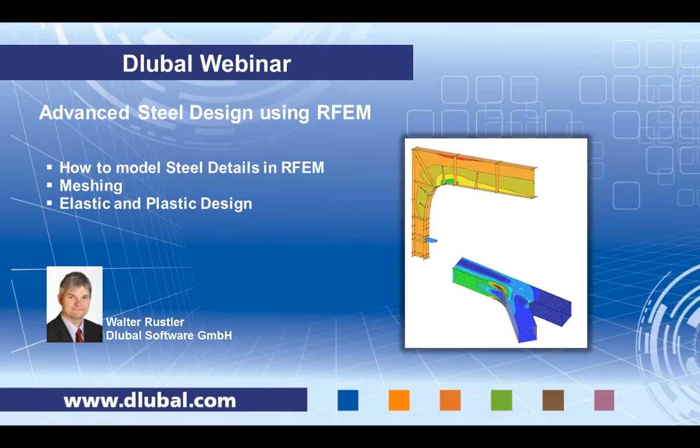Today we will see how to model steel details in RFEM. We'll also talk about meshing options that we have in RFEM, and then we will take a closer look at the elastic and plastic design capabilities inside RFEM and the additional modules.

When designing elastic and plastic models for surfaces in RFEM, we need additional modules. The main modules that we need are RF-STEEL, which is a stress analysis, which compares existing stresses to a fixed allowable stress. We also need RF-MAT NL, which gives us nonlinear material model capabilities, and this is required for plastic design.

If we talk about stability analysis, we need additional modules, RF-STABILITY and RF-IMP. We can then do an analysis against buckling, and we can do this in an elastic and plastic way. The procedure is to first have a linear analysis in RFEM for a surface model.

We need then an imperfection, and the imperfection can be derived from a buckling mode that is calculated in RF-STABILITY. We scale this imperfection mode to a certain size and use the imperfect model then as a basis for a nonlinear analysis and stress analysis. And we check then if the stresses are below the limit stresses. Important is that we use a nonlinear analysis for this check. We will see this in the live demonstration.

I now change to the RFEM software, and we start with modeling the structure. In order to make this a little bit shorter, I have already prepared part of the structure, which is the column. And we see here the column consists of actually 3 different types of plates. The web is an 8 mm thick plate, and then the flanges are made from 15 mm, and the end plate here is a 12 mm plate.

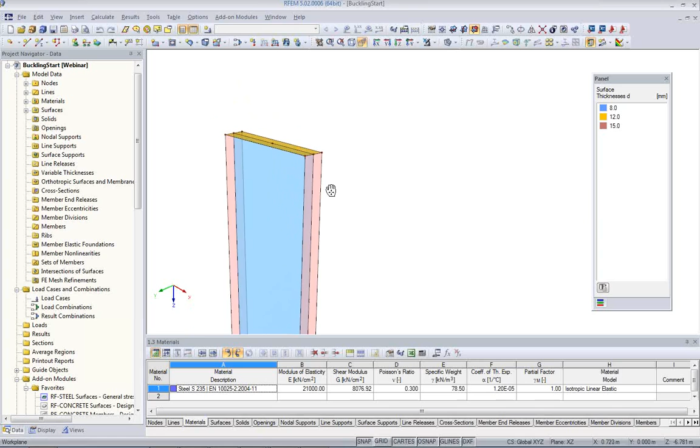We need now to model the part of the beam which is also tapered. We can do it in different ways. One way I can show you today is to extrude lines into surfaces. I select the lines and I go then to extrude line into surface. And when I do this, I get a dialog where I can set the material for the new surface.

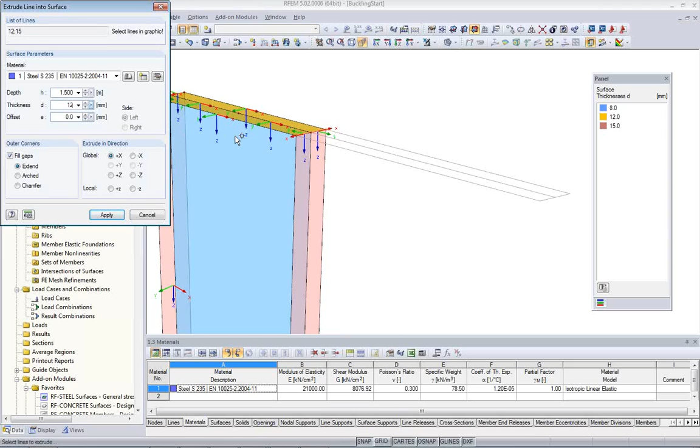First of all, I set the direction, which is the global axis X, and I see a little preview of the surface, and the length should be, in this case, 1.5 meters. The thickness of the plate should be the same as the end plate on top of the column, which is 12 millimeters. And with this, I can just press apply, and I create a couple of surfaces. Next, I'll create the end plate of the beam, which is now in direction plus Z, and the length is not 1500 but 600 millimeters.

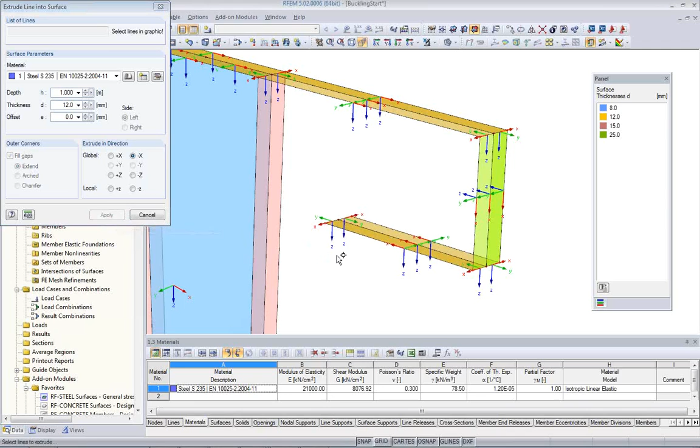The thickness should be, let's say, 25 millimeters. On apply, I get also this part of the structure. And I also can go back into minus X direction. Maybe I choose here 1 meter length, and again 12 millimeters of thickness. On apply, I get my flanges and the end plate created.

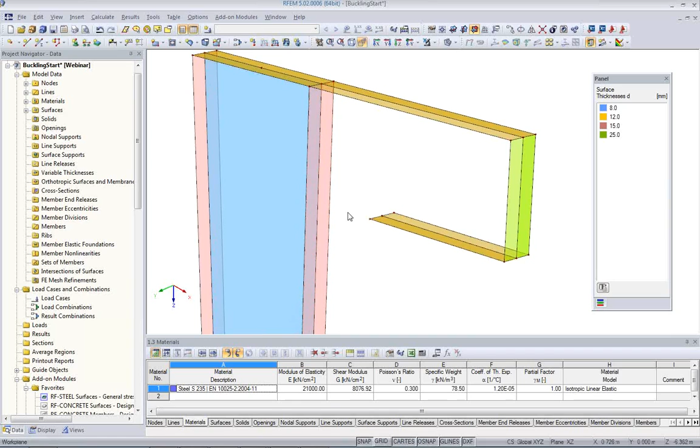What I'm missing now is the connection to the bottom part of the column, and I can do this if I would have here a connection node, or actually I want to have it on a certain distance, and the way I can do it, I can just create a division point on the lines. For this, it is important to know that the lines are modeled from bottom to top.

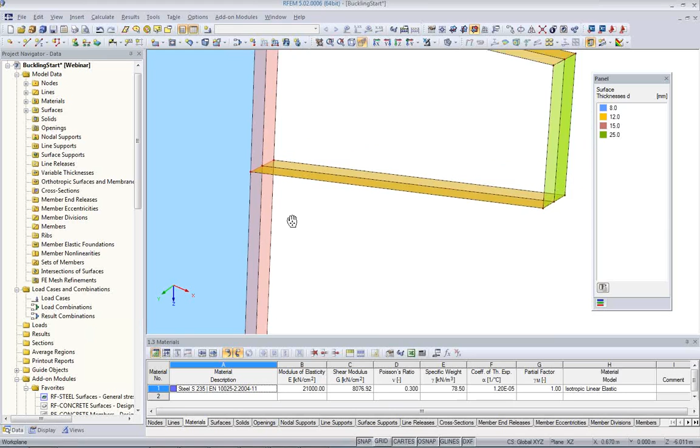And I can just select the lines, right mouse click on one line, and choose the command divide with distance. I want to divide it from the top, it is from the end, and I choose here 0.794 meters for example. On OK, I get here the division points. Next, I can select the end points of the surface and just drag and drop them, and they will snap to those other nodes. So this way I have the taper here very quickly modeled.

Next, I need the web. I can just simply select the boundary lines for the web. Thickness should be 8 millimeters again, it's a standard plate element, and I just select the boundary lines. Okay, this way I created very rapidly this beam part of the model.

I'd like to point out a few other things before we go on. In the display tree here, I can show the surface axis system. And when I show this, I see here there are some irregularities. This is important if you do steel stress analysis in such models, because all the stresses will refer to the local axis of the plate system predominantly.

So if I have different orientations in these local systems, when I show different stresses, I will see inconsistent stress diagrams along the surfaces. Because if I say, for example, I want to see sigma x plus, which is on the positive side of the local z-axis of the surface, then I see different values for both surfaces here. So because the plus side in the left part of the flange here is upwards and the minus side is downward. So if I want to see the stress on the outside of the flange, it's a good idea to reverse the local axes so they match.

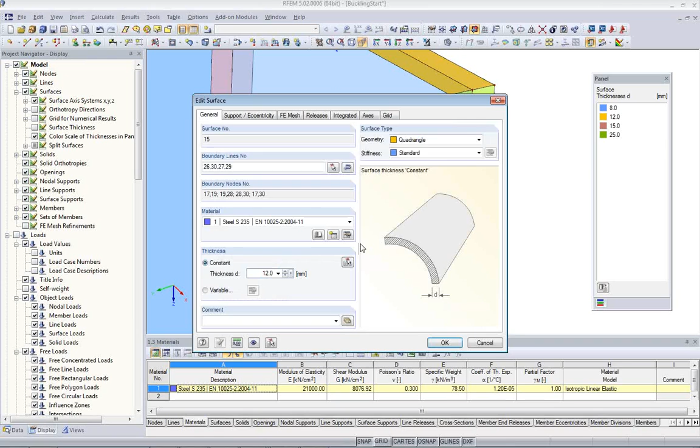Reverse local axis system. Here there's another specialty, because in the longitudinal direction of the flange we have the y-axis and not the x-axis. This is because the lower flange is not horizontal and it's a little bit out of the plane. How can I fix this? It is possible. For this I can use the following option. I double click on the surface, I go to axis, and here I find axis for input.

By default, the software chooses the direction. I can rotate it by a certain angle, or I can use axis and I can point to a line which will give the direction of the axis. So I pick, for example, the center line here. On OK the axis system is moved to the center line, but it's still wrong. The reason for this is because the line also points in this direction.

The same as the surface, I can click on the line and I also can reverse the line orientation. And now it's in the direction I want, and I can do this same thing for the other part of the flange. Axis, pick the template and click OK. It is important that you can check this.

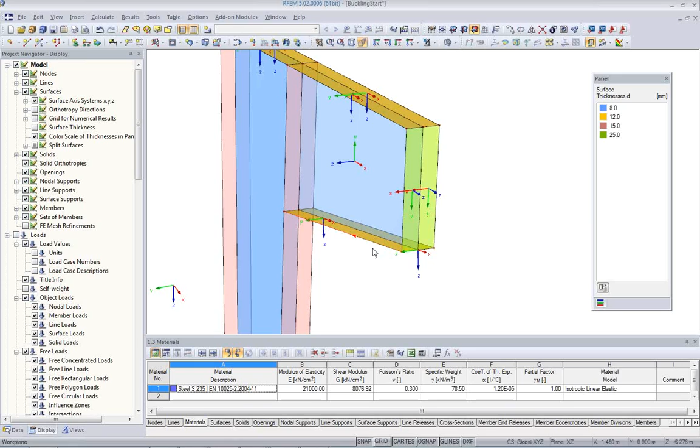This way you also can, for example, model circles or circle surfaces, and the local axis system will follow the perimeter of the circle or the radius of the circle. It is an important feature if you deal with such structures.

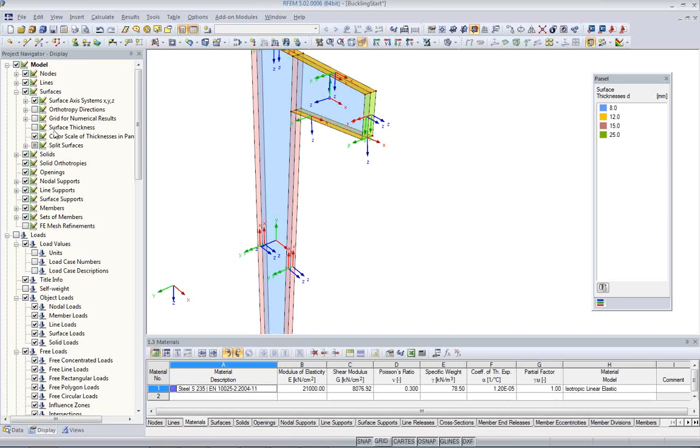Okay, let's check the web also. We have here the plus z direction of the beam and the column are different, so I do the same thing again for the column. Okay, now when I look at sigma x on the top flange, I get the same result for all the flanges, and I don't have to think which part of the structure I look at. Okay, I'm done with this, and I can hide the axis system again.

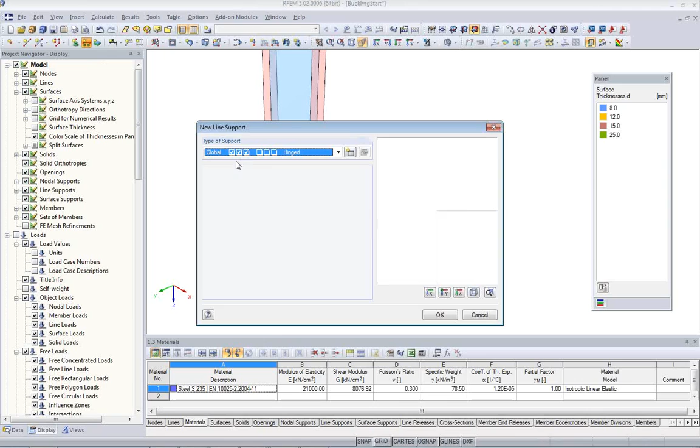Okay, next I'll need some supports. At the base of the column, I'll model a fixed support, and I can do this simply if I use a hinged type of support and assign this to all the lines at the end of the surfaces here. So because none of the lines can move, neither horizontally nor vertically, it creates some kind of a fixation.

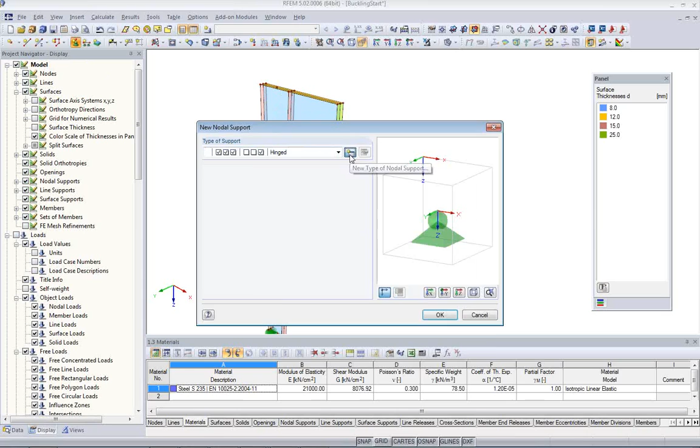Also, I need some lateral support. So I assume the knee here is held by some bracing in longitudinal building direction, and maybe some purlins are there. So I create a new nodal support that acts only in Y direction, and I assign this to the center here of the top of the column.

And also at the end of the haunch here, there should be some rotational restraints. So I have a fork type support basically that is horizontal and kind of holds the beam against rotation. If you find the support symbols too big, you can right click on it and decrease the size, or you can change it also with the right click in the display properties.

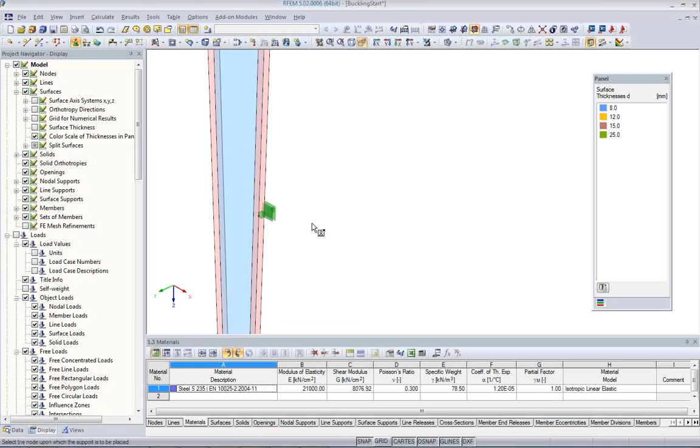Okay, one more nodal support I put here on the compression flange of the column to stabilize the column, and it should be of the same type, only horizontal in Y direction. I do this for one reason, to make it happen that we have later on, when we do stability analysis, a local buckling as the first buckling mode. Not in every case we have a local buckling of the web, it depends on the thickness of the web and the flanges, etc. Okay, the model I think is so far okay.

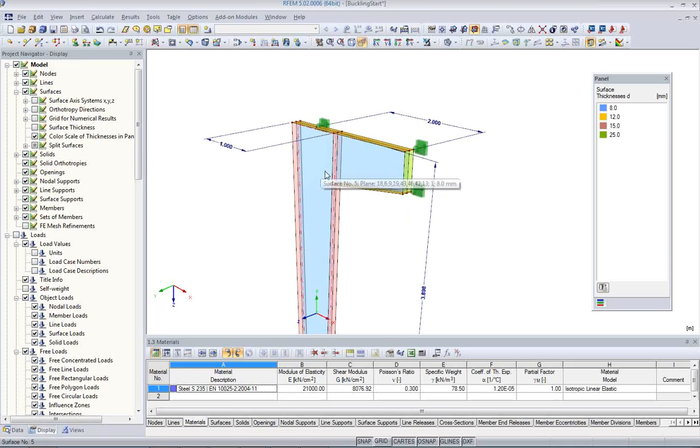Maybe to give you a better idea, I can show some dimensions. The depth of the beam here is about 1 meter. So when I take a look at the distance from the center node here to the edge, we have 2 meters. So if we introduce here a vertical load, it will create a bending moment of the amount of the load times 2 meters. So we have some idea what forces act here. The entire column is about 7 meters in height. Okay.

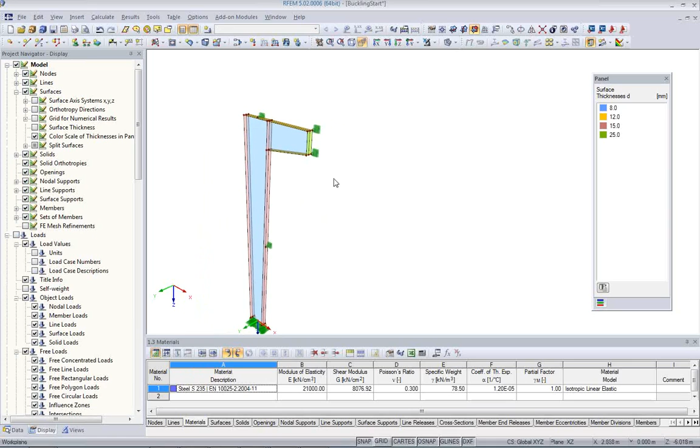Also, I need to talk now about loading. We need to apply some load. When I do the loading, I could also add here some beam elements and then model the rest of the frame, for example, as a member model, and then put the loads on the members, and the loads would be introduced automatically through the member. But I do here now an individual loading with a vertical load.

Typically what you should not do is introduce the load on one finite element node. So it's better to distribute the load along the depth of the beam, and the length of this center line here is 600 millimeters, just remember this. And if I want to introduce a bending moment of about 360 kilonewton meters in the center of the column, I need approximately, because we have here 2 meters, 180 kilonewtons of force here at the end of the beam.

So now if I want to do some kind of parametric analysis, I could calculate 180 kilonewtons divided by 0.6 meters, and I would get the value. But I have to do this each time I change the force. I'll show you how we could do it a little more elegantly in the software. First, I create a new load case. It should be without self-weight, and it should be geometrically linear static analysis. I call it design load. And let's assume this load has all safety factors and everything in it.

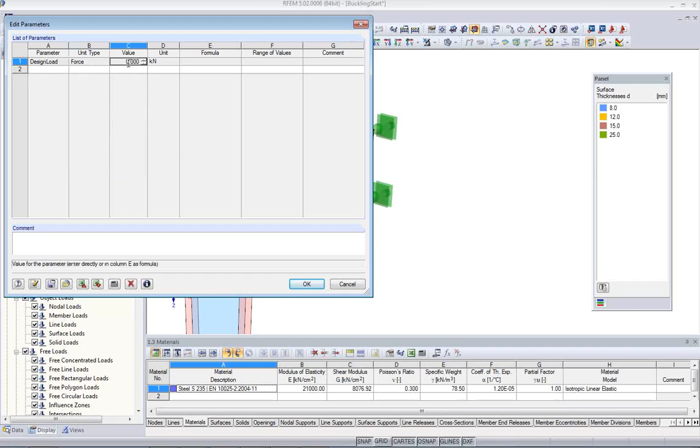Linear first order theory. In this load case, I create now my load, and I first create a parameter that's also called design load. The unit of this parameter is force, and the magnitude should be 180 kilonewtons. Now I will apply this force on this line. So I create a new line load in global direction related to the true line length. And I don't know the value here. I would have to figure it out.

But in RFEM you can use formulas, and the formulas use the parameters that I just defined. So I can use that parameter and multiply it by 0.6 meters. We always use basic SI units, and we see here there is a load of... 0.6 meters, that's not divided. We have to not multiply, we have to divide it, and then there is a load of 300 kilonewtons per meter.

By applying the formula, this value will be automatically entered here. We see a small triangle that signals the formula. On OK, I can assign the load here at the end of the line.

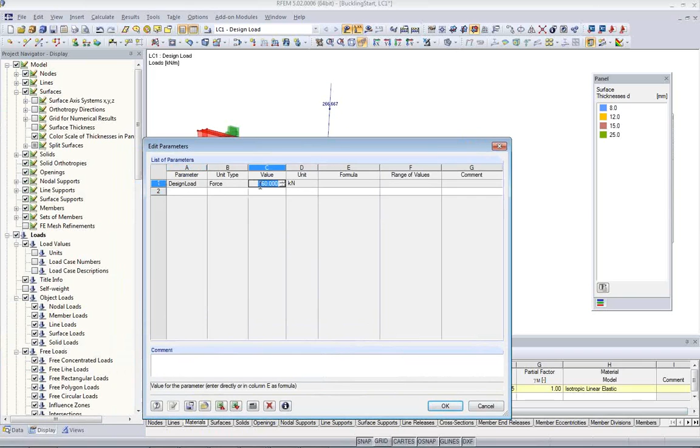If I want to change the load now, I simply go to the parameter, say 160, and if I click OK, the load will change. But I want to use 180, so I change it back. Just an idea of how RFEM helps you with such kinds of problems.

Before we can run the analysis, we need to talk about a finite element mesh. You find it in Calculate, Finite Element Mesh Settings. The important parts of this dialog are, first, the target length of the finite elements. It's set here now to 50 millimeters, but it can be changed to any size. RFEM will try to make finite elements with a mesh length no longer than 50 millimeters.

I'm not pointing out all the details of this dialog, just the most important settings. First, we can have some influence on the shape of the finite elements. They can be only rectangular, or quadrangle, they can be triangular only, or a mixture of triangles and quadrangles. We found that this mixture gives us the best results.

Triangular meshes are not necessarily lower in quality. It depends on what type of elements you have, and some surfaces cannot be created with just rectangular mesh shapes, so for us this seems to be the most practical way. But if you want to, you can select different settings here, and we also try to use identical squares or rectangles where possible.

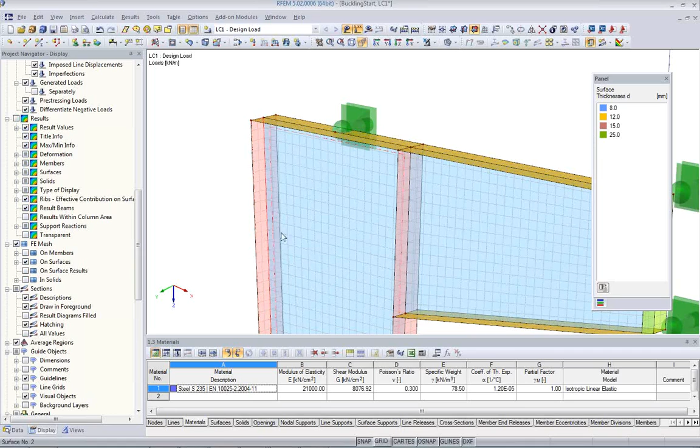But if you want to, you can change it, make a finer mesh overall, or double click on each surface where you have FE mesh settings as well, and a so-called mesh refinement on each surface. If you want, you can make it finer. If I do this once here, click on OK, only this surface will have a finer mesh.

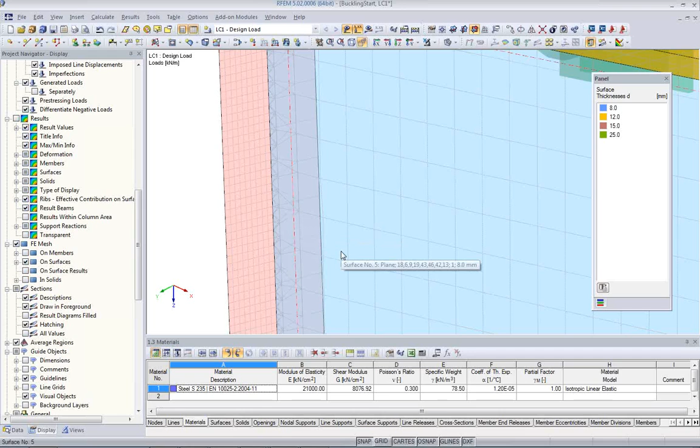Once I create the finite element mesh by clicking OK, it takes a little longer to create that mesh. Now we have a very fine mesh here, and the transition from the rough mesh to the finer mesh is done over certain cells of the mesh, which gives us a smooth transition from the coarse to the finer mesh.

This will create, of course, a longer calculation time, and you should think about whether you need a real fine mesh or whether you can get by with a coarse mesh. This depends really on the structure. In general, we say you should have maybe 4 to 6 elements along a surface of interest. If you don't have detailed interest in the results, you may get by with a more coarse mesh.

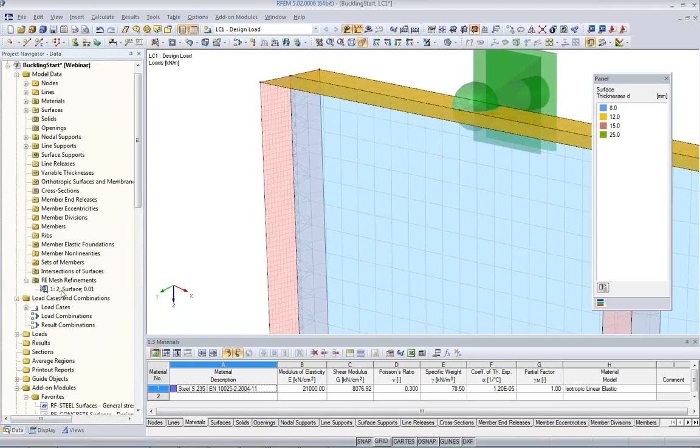I will delete this surface mesh refinement and stick with the regular mesh we have here, and create this one more time. Okay, I think now we are ready to run the linear analysis.

By the way, I have here 4 different thicknesses, and I show the panel of the thicknesses in this structure. With the views tree, you can activate... actually I wanted to show the display tree. With the display tree, you can show here the colors in the rendered structure by surface thickness.

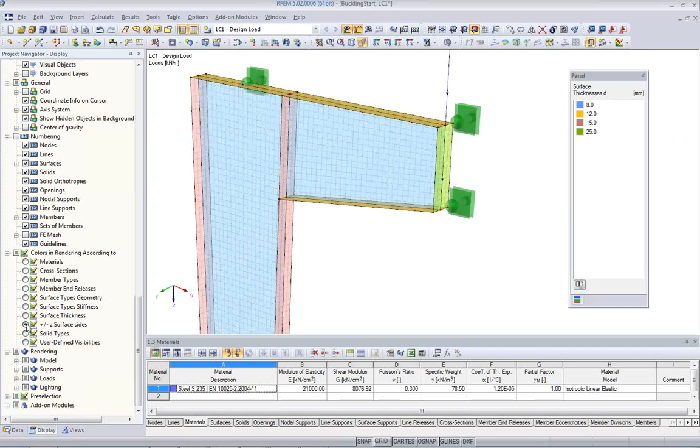By default, we have here materials, and the scale will be gone. But if you have here surface thickness, you see here the colors, and you can check whether everything is correct. Also, you can check whether the plus or the minus surface side gets also different colors. It's a good thing to control structures if they have different orientation.

The plus and the minus side will have different color. So you see here that, for example, the web has all the same orientation. If you look at it from the other side, it has a different color. So this is also a good way to control if everything is correct.

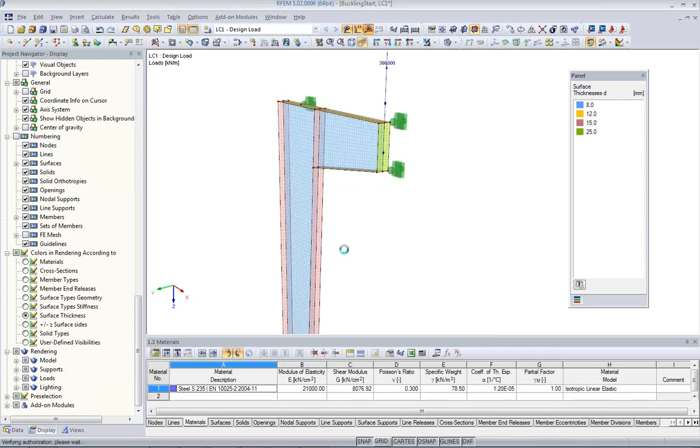We stay with the thickness maybe. All right, to run the analysis, I just simply say here, show results, and it will start the analysis. Now we have, I forgot to tell you, we have steel as a material, and it's linear elastic.

What I see here are, well, I see here first a new result navigation tree that starts with deformation, and I can check if my results are okay. I can hide, for example, the load. Hang on, decide, hide my loads, okay. And I can see if everything is symmetric.

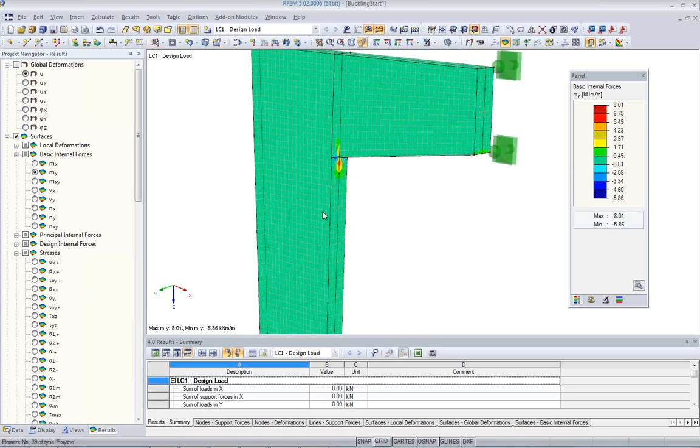So there should be no deformation in Y direction and in X direction, of course, but everything looks good. I also should take a look at my basic forces, like I have bending moments, and that should be also symmetric. I have bending moments the other direction, and I have axial forces. And if I have everything correct, then I get a nice symmetric view. This is a good way how to control if your input is correct.

Also here, if I have a force downward here, there should be tension. So orange, if I look here, it's positive, so it's tension. Blue is compression, so it looks to be okay.

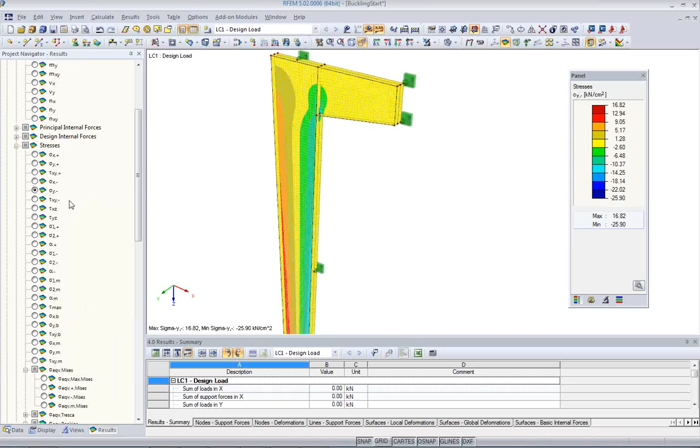Same way is with the stresses. I can go down and I can show sigma x, I can show sigma y on the positive side, for example, sigma x, and sigma y on the negative side. So there are different values. If I go here, there should be different, should be visible, and it's important to have the directions correctly.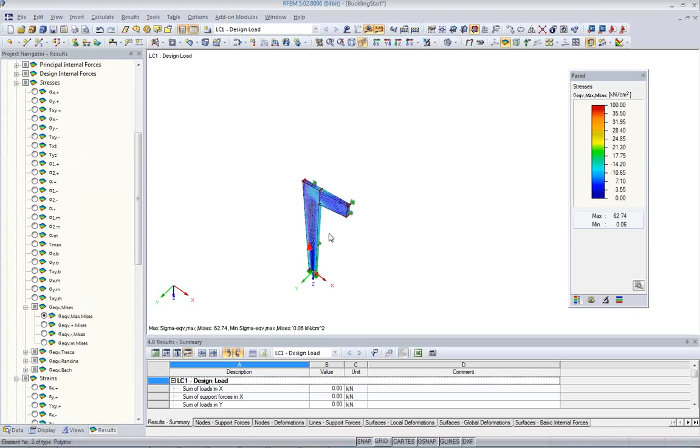Important is also maybe to look at the equivalent stress, von Mises. If I look here, I get a nice smooth display of my equivalent stress. But I only see the existing stress. I don't know, do I have stress over the yield strength, for example.

To do this, I'll have to take a look at RF steel surfaces. Inside RF steel surfaces, we can check against a limiting stress. It's a quite simple module. We have the ultimate limit state design case, and we check here our design load case.

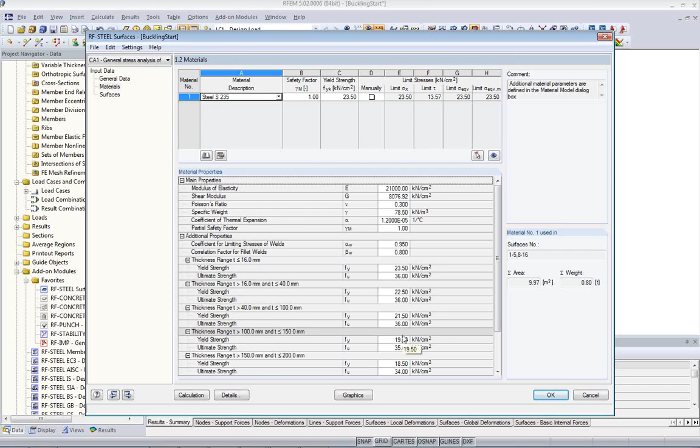I could do also deflection, so it will check some deflection, but in this case, deflection is out of scope. So I see here all my materials and my yield strengths for different material thicknesses, which is also important because if you work with thick materials, you can have different yield strengths for different thicknesses.

The surfaces are listed here, and with this maybe I check the details. In the details I have options to set the individual stress types. I can check my limit deflections for the serviceability limit states, and in the options I have the options to say the important things are distribution of internal forces, and it's set to continuous within surface. I will come back to this point later.

Maybe because I read it here, one important thing results in FE mesh points and grid points. There is an important thing which I have to show maybe after I go back to RFEM.

Let's first start with calculation of the stresses and comparison to the limit stress. I run the analysis and I see here now I have shear stress, main stress, positive side, negative side, medium or membrane stress, and equivalent stress, which is exceeded by a ratio of 2.67. And you see here also, if I click here where this exceeding part is, typically it is now here where we have this compression point.

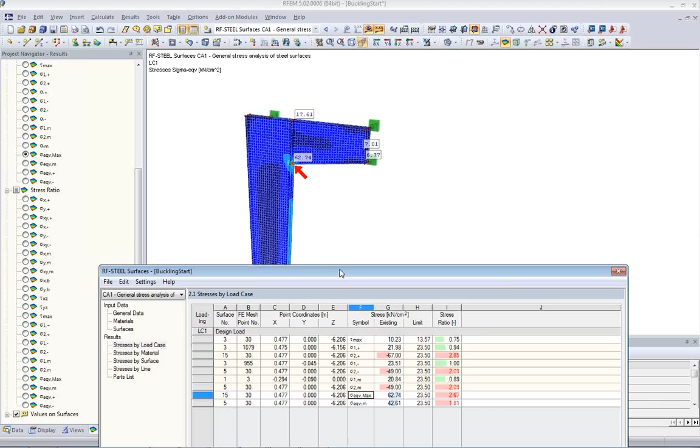Okay, so let's take a closer look at this in the graphics. We see here the stress ratio for sigma equivalent in RF Steel Surfaces, and I can show it here. Everything that is above 1 is really dark red.

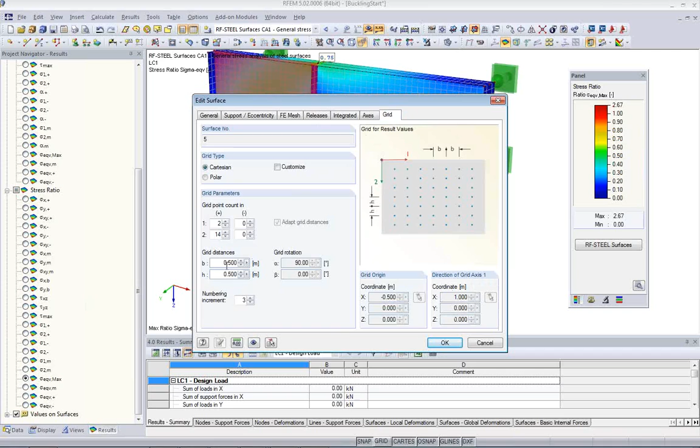Here we have some problems, some local overstress that I need to take care of. But I was talking about grid points and mesh points. It's important to know that each surface has an overlaying grid which can be controlled for each surface. It's set very coarse here. This is good, for example, if you work with concrete plates that are wide in dimensions, and you can control the output of the numerical values by grid points or mesh points.

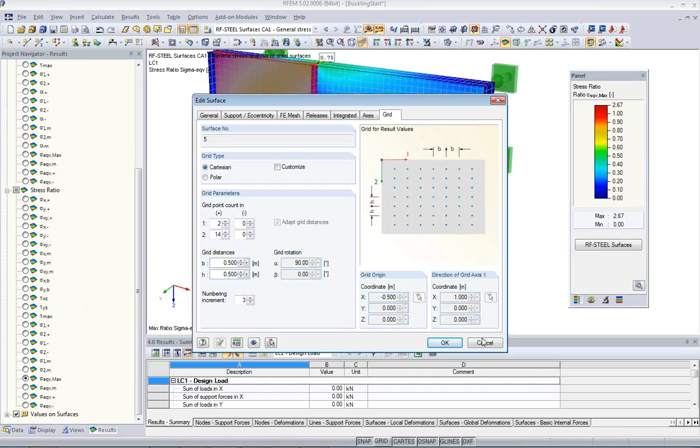In RF Steel Surfaces, I also have the option to set whether I want to see grid points or mesh points. If I say grid points, I have to recalculate and there will be fewer points. So mesh points is a good idea for such small dimensions. Here too I have the option to show results in mesh points and grid points.

If you want to reserve some capacity of the material for other things, you can reduce the allowable stress ratio to 0.8, 0.6. By default it's set to 1.

Okay, so now we have the problem that we have some places where we have too much stress. So what do we do with it? We'll do a plastic analysis. So this is the stress ratio. And how can I do it?

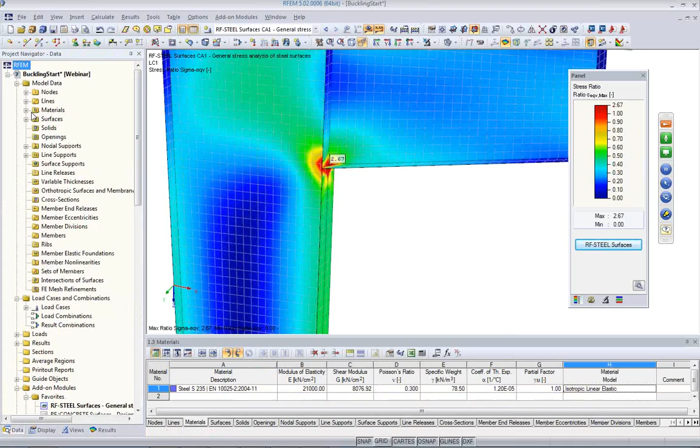For this, I go back to the material table, and in the material table, or you can also do it in the Data Navigator, you have materials, and you can edit the materials there as well. You have different material models. By default, RFEM comes with the isotropic linear elastic material model, and you can also use the orthotropic elastic 2D material model. All the other material models are part of RFMAT NL, an additional module that unlocks those options. There is an isotropic plastic 1D model for plastic analysis of beams, 1D elements. There is an isotropic plastic 2D, 3D material model that we'll take a look at pretty soon.

There's an orthotropic elastic 2D model, which allows you to have different stiffnesses in two different directions on a surface. There's an orthotropic 3D model, a more advanced model for 3D which has orthotropy in three directions, X, Y, and Z. The same thing is also possible for plastic design. An interesting thing for steel design is also isotropic thermal elastic, which allows you to set different elasticity moduli for different temperatures. So if you have a heated structure, the material gets softer.

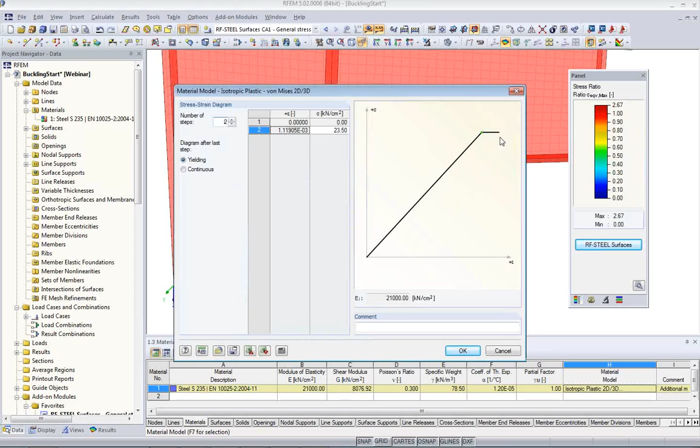The yield strength is entered here. It's set now to S235. We have a bilinear model in this case, so we can model some strain hardening above the yield strength. You can also use a diagram. The diagram in this case is identical for tension and compression. As a simplified model for trying things out, you can do linear elastic only, which is the same as we had before. I use the basic function with a yield strength of 23.5, typically for such cases.

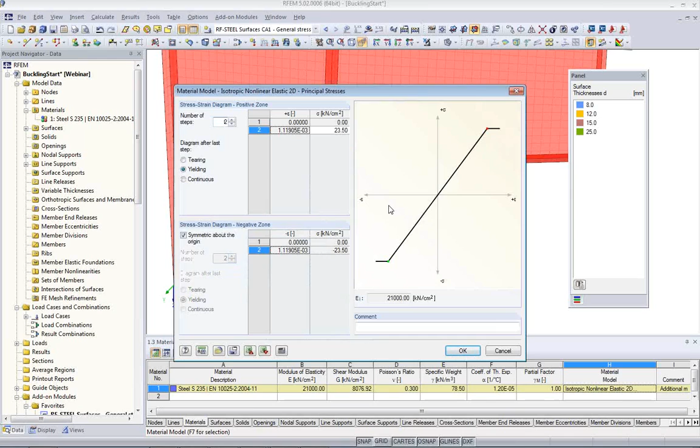Okay, another material model - this was for von Mises stresses. Another material model interesting for steel structures of this type is the nonlinear elastic 2D model, which is similar to what we've just seen, has the same options, but it can also behave differently in compression and tension, which the other model cannot. And it refers to the principal stresses. If you use the von Mises stresses, there can be situations where the principal stresses are higher than the von Mises stress, so you do not get the worst situation, I would say.

But it depends on regulations that you have to follow, which type of stress you have to check. I use this model now, and I use the basic function with a yield strength limit of 23.5 kilonewton per square centimeter. Since all the surfaces use the same material, all the surfaces can now yield.

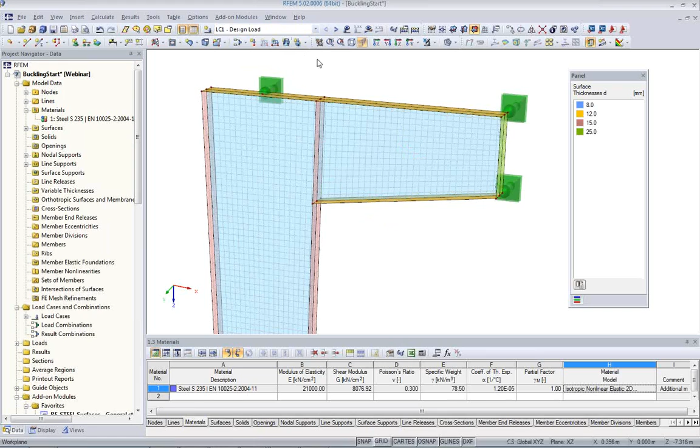Let's take a look at the results, and I calculate this first load case nonlinear now. You will see there are some iterations. First of all, we see here load increments, and different iterations because we have to check in each iteration what is the yield strength in each finite element mesh and how we have to change it.

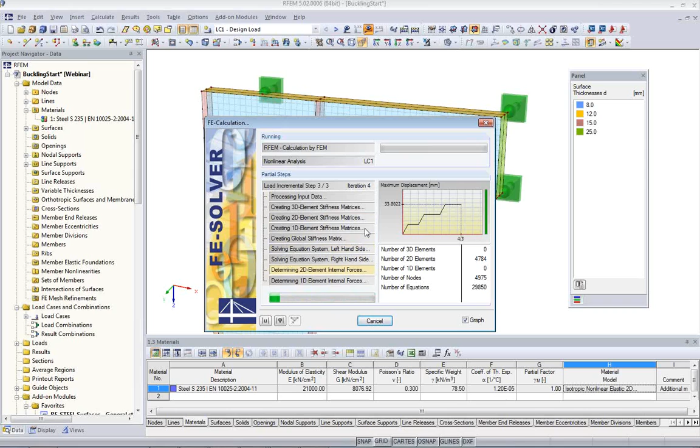It's also a good idea to work with load increments because you gradually load the structure and yielding starts gradually at the worst points and spreads from there. If you have a large yielding area and you apply the load in one step, it is kind of a shock for the structure because there's a big change in the strength and stiffness of the structure, and it can lead to not so good convergence during the calculations.

What we see here now is again the equivalent stress, max von Mises. And we see here it's still quite high. It's not 23.5. What is the problem? I have to explain a few things.

First of all, we change for each mesh cell, we change the stiffness. Therefore it is not a good idea to smooth the results, which is what we do by default over all surfaces. RFEM has some specialty how to display results. In general, you get rough results and you want to smooth them over one surface. But when we look at the plastic design and we change only the results per finite element mesh with one, let's say, elasticity modulus, then we have a constant stiffness over the mesh, and we cannot change the stiffness over the mesh in each point.

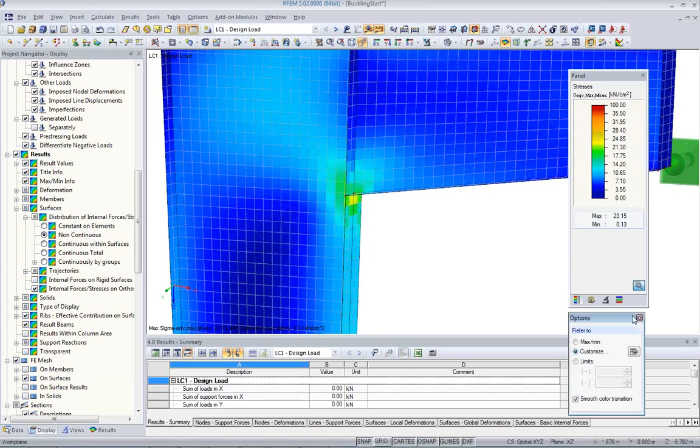So therefore, we have to take a look at the results constant per mesh. We can do this here with surfaces in the display navigator, under results, surfaces, distribution of internal forces, stresses, continuous within surfaces. So I mesh it, I smooth it over each surface. I can say non-continuous, you see there's a little bit of difference. Maybe I change the smoothing, and I can say constant. And if I go to constant on element, you see here that my stress is not red anymore.

Maybe I have to show this also in the result navigator a little bit differently. In the result navigator, I have the same trees as before, but I have additionally also criteria, and one criterion is the design ratio here. Because we have a yield stress, we can compare existing stress to the limit stress. And here we see we have now utilization ratio 1. We see here also with the nonlinearity rate where some yielding has happened.

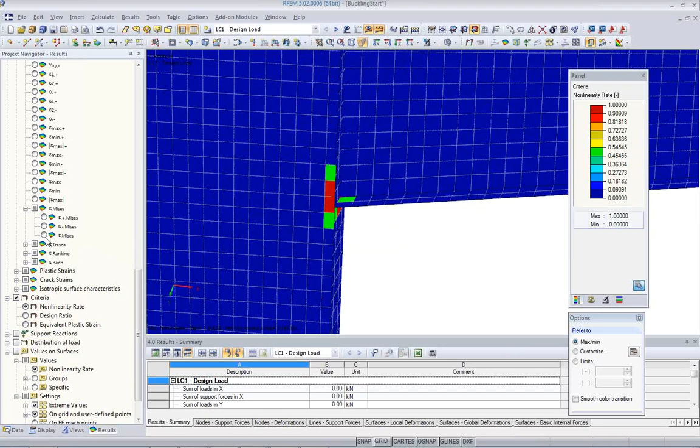And we should also take a look at the strains. The strains should not be larger than 2%. So once the material yields, the force will stay the same inside the material, but I can kind of elongate it as long as I can, but the strains cannot be unlimited. So in general, the limit is 2%, so 0.02. And we here have no problem, we are far away from that.

Design ratio is clear. And we can take also a look at the real stresses. There we should have now only stresses that are below 23.5, and we see that's the case here.

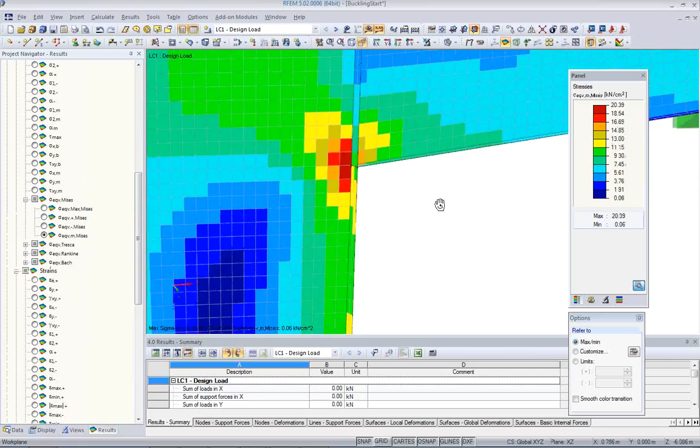Maybe to explain a little bit more about this smoothing, I can display here again the different options, but I also show the results. I show the result values, not the extreme values. I want to see everything.

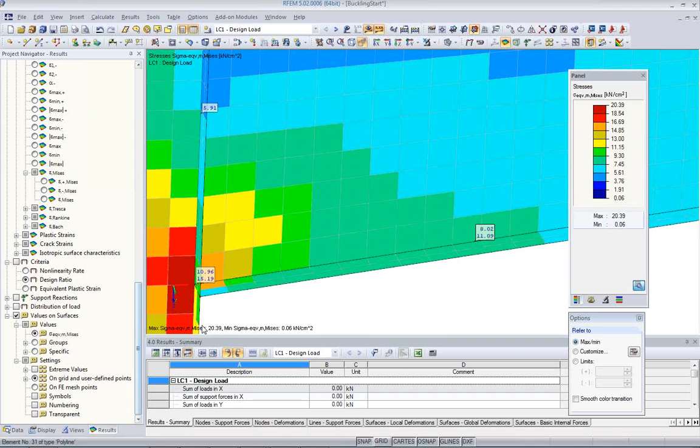On grid and user-defined points, on FE mesh points. So now we see here, if I look for each cell here, I see there is one value for each surface. If I go back to display and change it to non-continuous, I will see, it takes some time, I get for each finite element, for each connecting mesh cell, one value. Because I have 4 elements in this case, I have 4 values, and they're slightly different. So these are the values that I get from the calculation.

But nobody wants to work with such values. That's why we smooth them. In general, we smooth them.

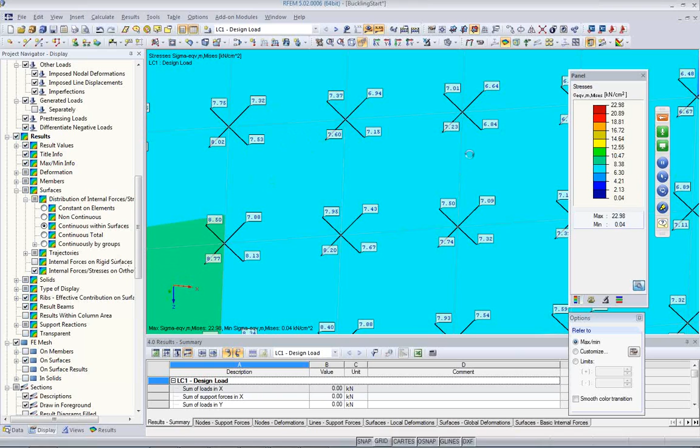So within each surface, we make the average of all 4 values and display the average value. If you talk about stresses, we cannot go over the surface edge because stresses are different when there's a different thickness. And if I smooth over the surface edge, I would make a mistake.

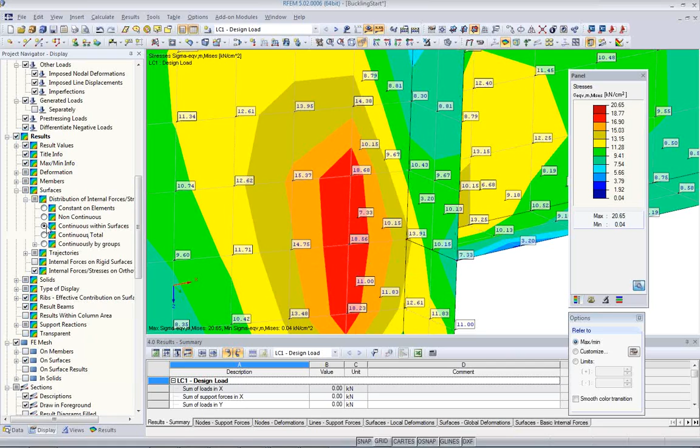This is why here are 2 values, because we have different thickness here in the flange as we have in the web. If I smooth continuously total, then I get 1 value also here, but there's a thick material, I have low stress, and there's a thin material, I have high stress, and make the average, which is not correct here. I have to stay within the surface, and this is why continuous within surface is on default, which is good in this case.

For elastic design. If I do plastic design, I have to look at the constant on elements results always, and I get an averaged value for each mesh cell. So it's also important to know, I hide the values again, that in that case the mesh might have to be a little bit finer when I do a plastic design, because I can then in a smaller grid change the stiffness on the structure.

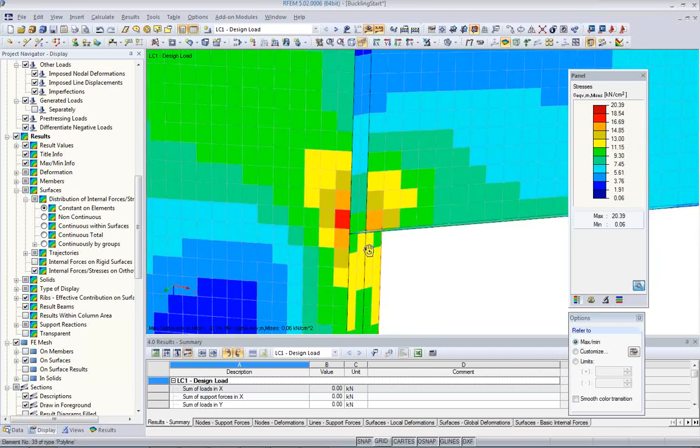So therefore, in structures like this, or where there are some points that are difficult, I can also introduce another mesh refinement for a node. I create a new one on this node. I create a rectangular or circular refinement, and by default RFEM creates a radius 5 times the global target length of the mesh, and the outer length should be the target length, which is compatible with the other mesh, and the inner length is 5 times smaller. If I do this, I have to erase the results and do one more analysis. Run this analysis, and then we continue with the buckling check.

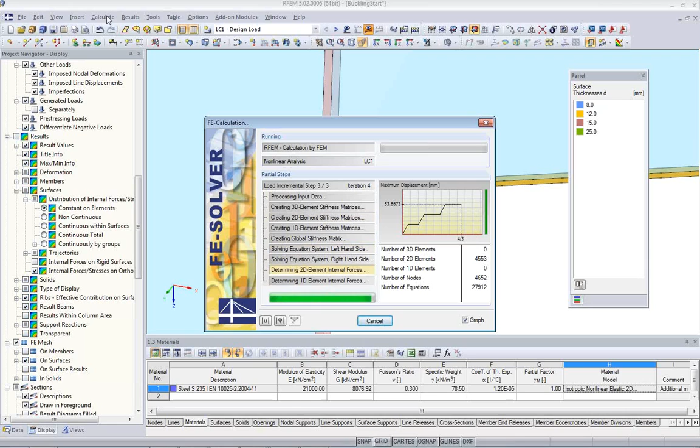Okay, load increments, one more time, I explained already. I have to show you where I can set those options. Those are in the calculation parameters. You can set increments. It's by default, I think, set to 5. If there are problems with convergence, you get a message and you can change it. If not, maybe you can stick with less increments and increase the speed of the calculation this way.

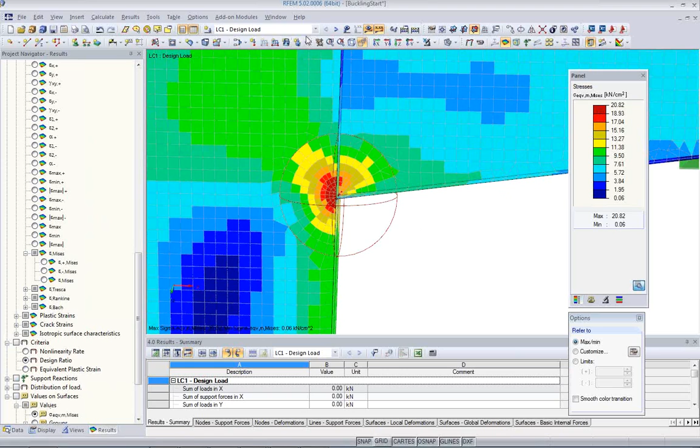Okay, we're still okay. We have for Mises stress 20.82. Also in the RF-STEEL module, if I go there, I can start it here again. As I showed you before, I can set those values here constant on elements. So also here, here's this setting. If I calculate it, I should get the same results, and the utilization ratio is 1 in this case. Okay, great. We are done with stresses. Everything is fine, and we don't have to do anything.

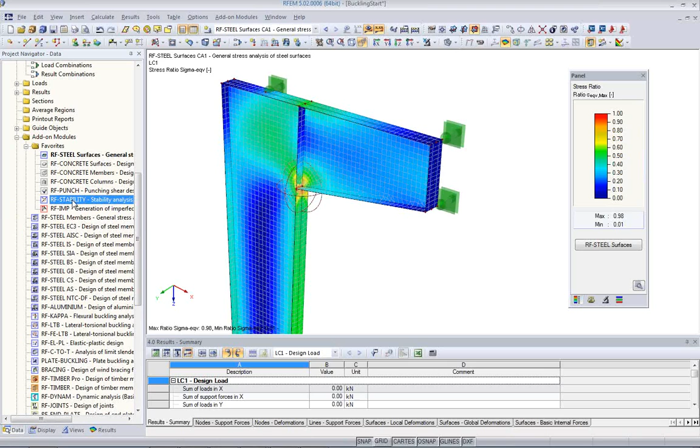Well, we haven't looked at stability yet. It's a very slender structure, and when we look at stresses, we have no check about buckling, local buckling, flange buckling, web buckling. This is not checked. How can I do this? As I showed you in the introduction, we need to have imperfection. We need to scale the imperfection in a certain way, and we need to have a certain shape of the imperfection. For this, I use the module RF-STABILITY to create shapes and to find out the critical buckling load actually. RF-STABILITY can be started by double-clicking on it, and by default I analyze 4 eigenvalues. This should be enough.

I have to enter a load case as a basis for this eigenvalue analysis. I need the axial forces in this eigenvalue problem to find the eigenvalues. And I have only one load case, so I use this one. It's basically the one that I want to refer my critical load factors to. I can run an eigenvalue analysis, or I can also run an incremental load analysis. That means I run a nonlinear analysis inside RFEM and gradually increase the load until I get the instability message.

The difference is that I also take into account force or stress redistributions during the iterations, failing members, and all those things, while the eigenvalue analysis takes the axial force level from this load case, the stiffness matrix from this load case, and runs the eigenvalue analysis based on this, and there's no redistribution. Those are actually the 2 important features here. You can choose between Lanczos, roots of characteristic polynomial, subspace iteration method, which is also very common, and another iterative method, the ICG method, which is less demanding on memory but also takes longer.

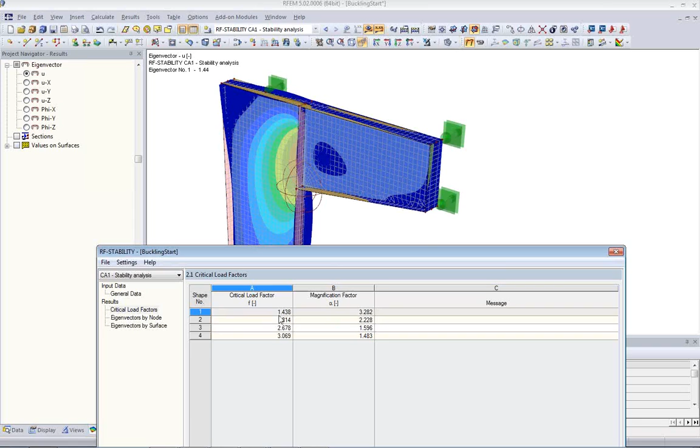Okay, with this I run the analysis and I get 4 eigenvalues after a short time. I get the critical load factor, which is a number, a figure that tells me how far I'm away from an instability status. I can increase the load 1.4 times, and then I get this buckling mode that is displayed in the back. And then there's a second one and a third one, and so on. And this factor shows me that there is some danger, and I have to do a nonlinear analysis and maybe also take into account local buckling.

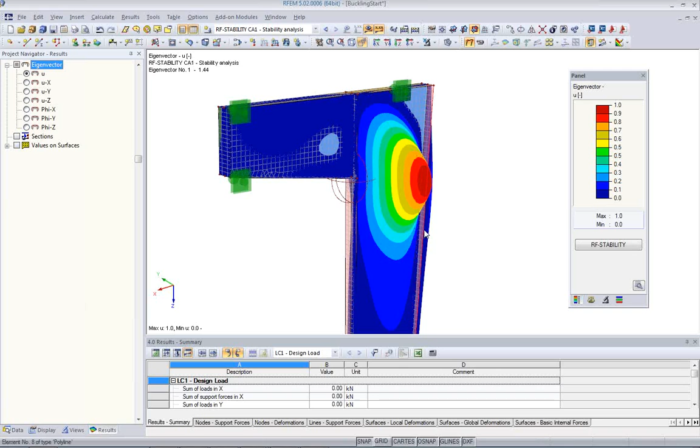Okay, let's take a look into the full graphics. And here we see the first mode. And the first mode is this buckle here. And you have to check the lowest eigenvalue modes and do a nonlinear analysis on an imperfect structure. So I will use this buckling mode to do a nonlinear analysis, and I need to create an imperfect shape from this. How can I do this?

I go to the module RF-IMP, and in RF-IMP you can create imperfections. You can make a predeformed initial model. It will stretch or change the finite element mesh according to a deformation of an RFEM load case or according to a buckling shape from the module RF-STABILITY. And I choose the first buckling shape, which is what I see here. Now I need to scale it, and I have the option here to enter an ordinate for the scaling. So I scale it to 20 millimeters in this case. I'll tell you in a second why 20 millimeters.

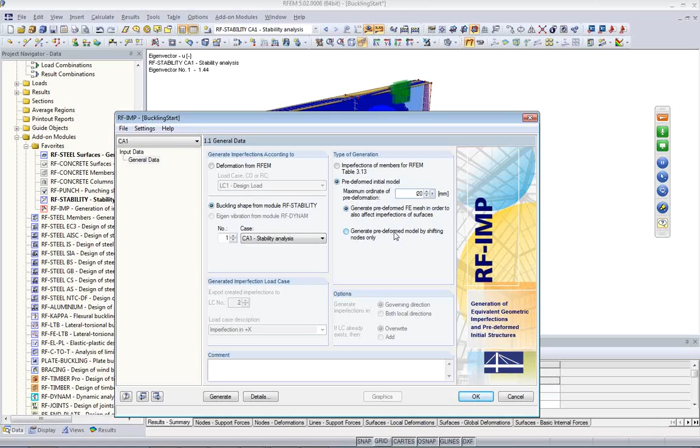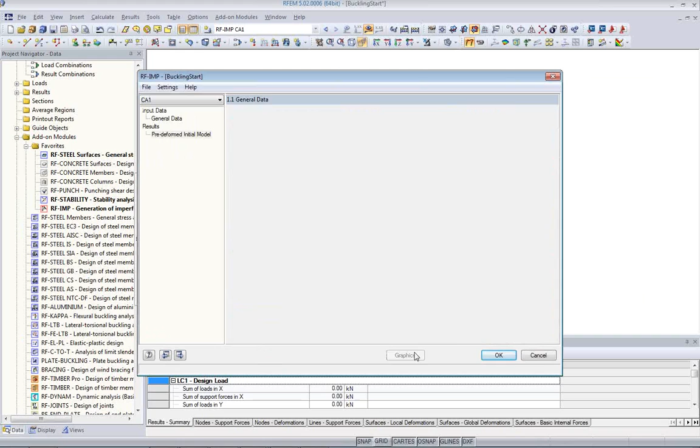A buckling shape is normalized or standardized. That means it has basically no direction and also no size. And by this ordinate, I give the deformation a certain size. I get this as numbers, and I can look at it also graphically. Actually, if I want to show it on the other side, I put here a negative value and it scales it to the other side. So this is just an optical thing, but it's maybe the way I'm used to work. So this buckle here is now 20 millimeters deep. It's shown emphasized, so the buckle of course is smaller, but it looks like this.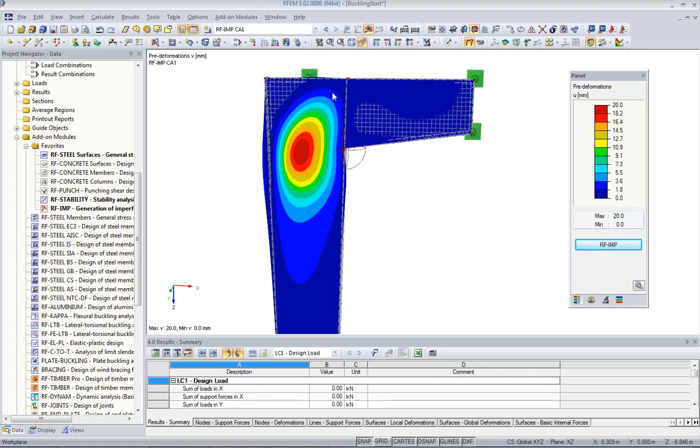And why 20 millimeters? In Eurocode, for example, you have to scale the buckle in reference to the length of the buckle. So for example, if you have a beam supported on both ends, you can imagine the curvature, you would use something like length divided by 200 or length divided by 150. Actually, if you use Eurocode 3, EN 1993-1-5, you find here some hints how big those buckles have to be. And if you use a plastic design, it should be 1/100 of the reference length. And the reference length is the distance of the edge of the buckle, I would say.

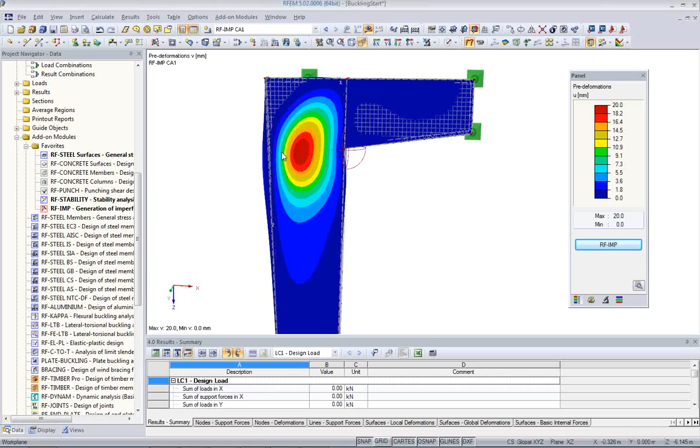I can measure this here by using the measuring tool, distances between two nodes. And I can estimate from here maybe to here. And the distance is about 1.9 meters. So roughly I figure 2 meters divided by 100 is 20 millimeters of scaled value. I also could use this distance and would have less scaling, but there is a little bit of discussion about how to do this and which values to take into account. So I'd rather go a little bit on the safe side and make the buckle a little bit deeper.

Okay, I have now my imperfect shape. How to apply it into the analysis? I copy the load case, so I have a comparison. Copy load case to load case 2, and I call it with imperfection. This load case I now edit, and in the calculation parameters I could apply second order analysis, which is a more simple higher order analysis, which is of linear nature actually, or I can also use a little bit better analysis, which is the large deformation analysis, based on a Newton-Raphson iteration, and it gives more correct results once you have larger strains and larger deformations. So I have it available, so why not use it?

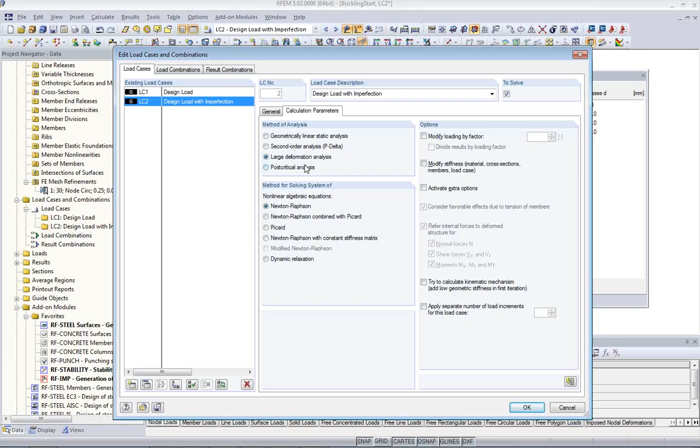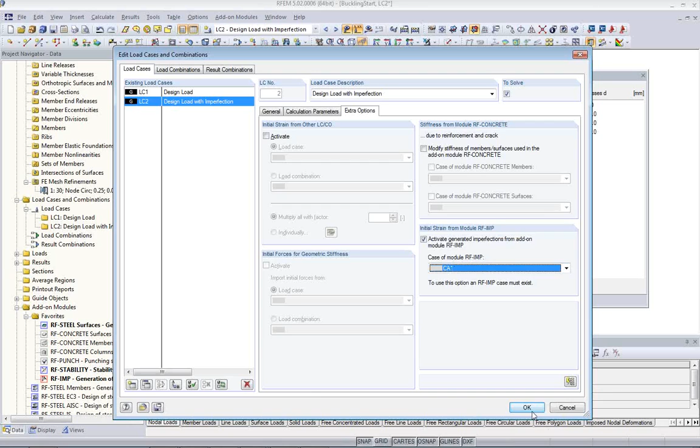And also I activate extra options. And when I do this, I get a new table here, and in this table I can activate generated imperfections from add-on module RF-IMP. And I choose the case that I have defined there. So when I run the analysis now, I'll apply the imperfect structure and I do a nonlinear analysis on this imperfect structure.

Okay, let's run the analysis and calculate it. And now we will see again a little bit higher amount of iterations, and you can follow here also the displacement scheme, and you see here that iterations will be more as closer we get to the highest load level. Again, I chose 3 load increments. Depending on the structure you're doing, you might need a little bit more or less.

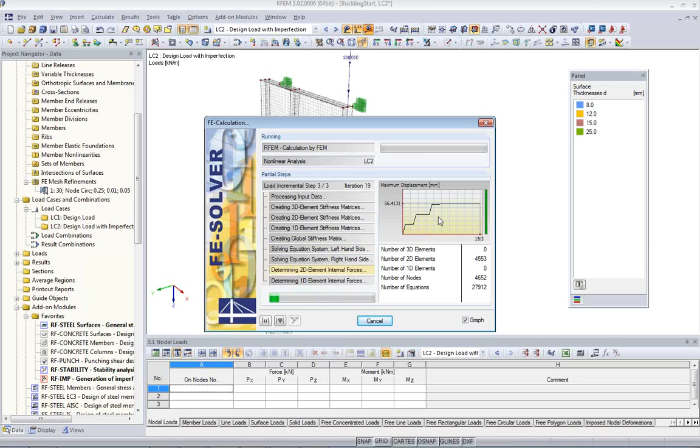Okay, then after a while I should get some results, and we will take a look then again at the stress distribution and deformation to see if we really applied the imperfect structure. So you see it's more iterations because there is probably some more yielding going on because I have not a perfect structure anymore. And if you have a lot of finite elements, it can be a time-consuming thing, and even with today's calculation options and computers, it's not so simple to analyze a 3D building, for example, in such a way.

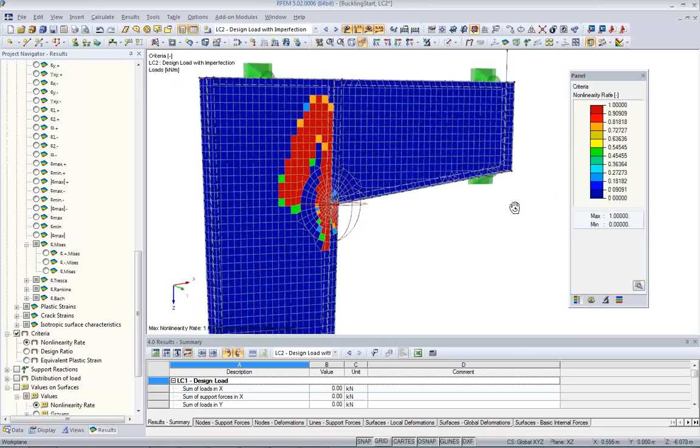Also, we should again check the stresses, and they are now also higher and almost above the limit what we allow. And this here is a very slender structure, so I don't know if we should really build it in reality without some more stiffening. But it's good for showing the principle how we do such design, and now, based on this, you can decide whether you introduce more stiffness, whether you change web thickness, and so on.

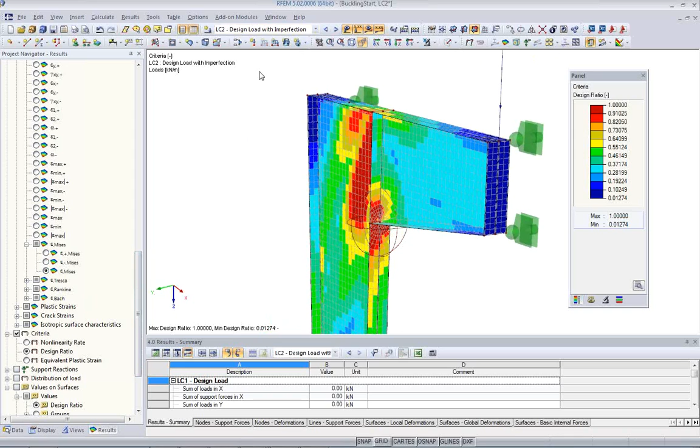Maybe we also take a look at this load case, in the direction of deformation in direction Y, and we see here it follows the buckle that I have defined as pre-deformation. So it seems to be right, and through this imperfection we get an extra bending moment and extra stresses into the structure. Okay, this is the principal way of how to do such a design.

As I said, if you have other buckling modes that are close or just above 1 or below 10, you should consider also those imperfection modes and make different cases of imperfection and check if everything is fine. It could be that in even higher buckling modes we find instabilities because of yielding. We have a high nonlinear effect, and it could be that the model is not stable anymore. So you have to check several buckling modes.

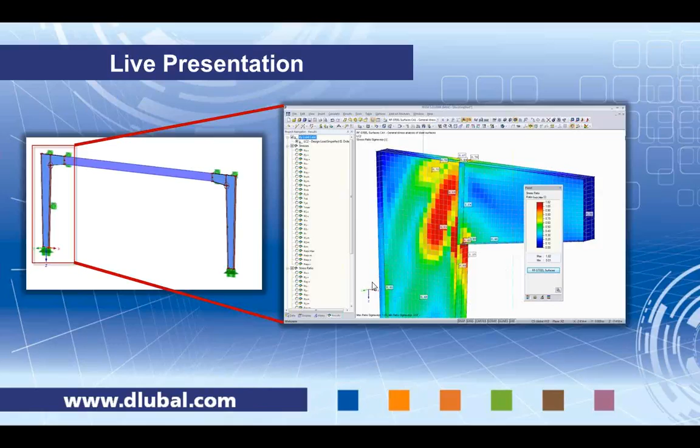There was the question, where can I set the increments of the iterations, the load increments? I go back to RFEM. You can do this here in the calculation parameters, and here is a setting. You can do it for load cases or for load combinations, and here it's set to 3, or to 5 for load combinations, for example. Because we have an iterative analysis, there is also a maximum number of iterations that has to be set here. It's set to 100, so if you reach that limit, you will also receive a message that it is not fully iterated.

Also, if you have non-linearities like material models, you can disable them here in the calculation parameters. This is maybe helpful if you have instability and you want to know, is the instability caused by a material nonlinearity? You can deactivate it for some trials. Also, you can set here the solver options, 64-bit for example. Some may ask what is the plate bending theory behind RFEM. There's Mindlin and Kirchhoff that you can select here.

Yes, I think those are the most important options here. There was also a question: can I also model bolted connections? I have shown this in previous seminars. Please refer to the website. On our website there are the recordings from the older webinars, and there are some about steel connections.

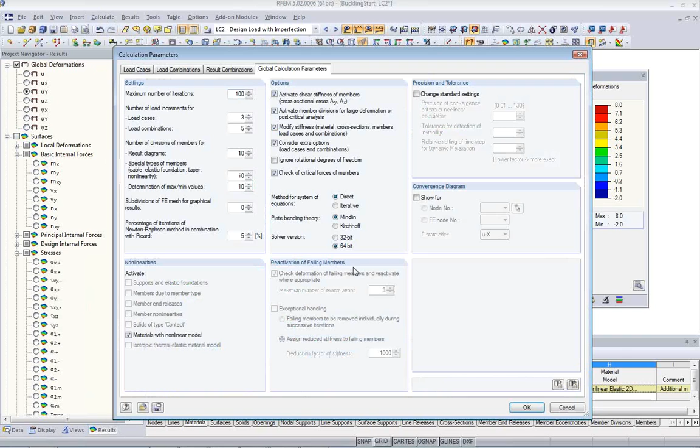Then there was another question: what about post-critical analysis? Can you handle a snap-through problem? Not in the calculation parameters, but in each load case, if you edit a load case, you have here the option to set geometrical linear, second order, large deformation, and post-critical analysis.

Post-critical analysis is for example a snap-through problem. If you have a von Mises truss and you lose stability because it snaps through to the other side, then it's a little bit difficult for the solver to find a stable solution again of the equation system. If you have a snap-through problem, you use the post-critical analysis option, and that should help you find this solution.

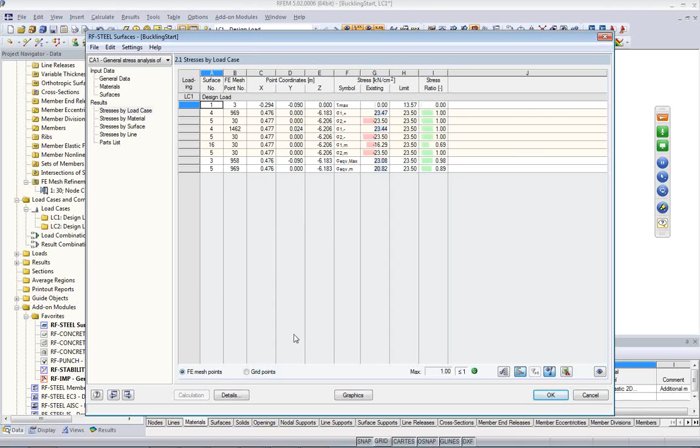Okay, then there is one more question. What about fatigue design in steel analysis? If you want to do fatigue design, we don't have a specific module at the moment. We're planning to have one, but it's not yet available. But what you can do now is, if you have the RF-STEEL Surfaces module, which is part of the RF-STEEL module, you can set here stresses, sigma delta.

I think they are only available if we have several load cases. Hang on, I'll have to change a little bit. Details. Sigma equivalent, sigma. We cannot do a fatigue design, but we can give you the stress ranges. Here it is. I'm sorry, there's a new table, stress ranges.

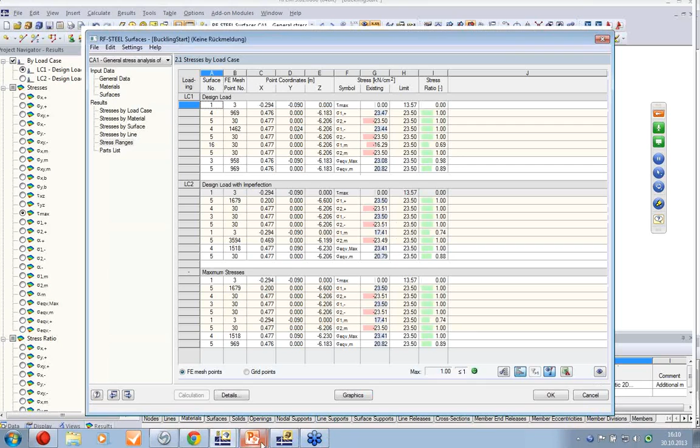And if you get the stress ranges, that means you get the difference from the lowest to the highest stress, which is an input figure for most of the fatigue design codes. So you need to know the variation of the stress. Is it only compression? Is it only tension? Is it maybe compression and tension? The stress range is an important figure for this, and we can give this here as a result. So it's possible to do that. Okay, I think this is it with the questions.